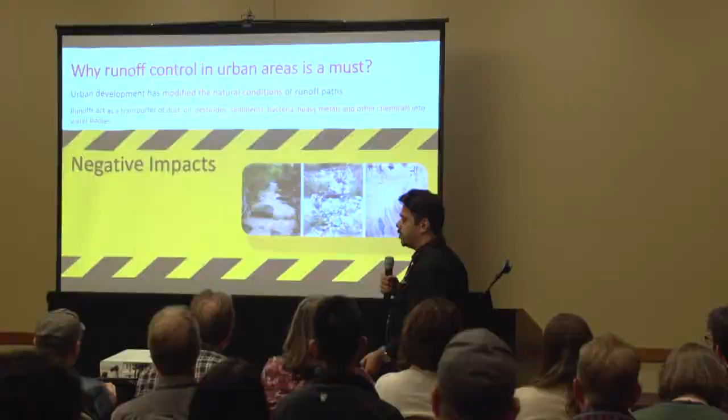When this happens, what are some of the negative impacts? The water quality will be impaired as the first consequence. The fish will be killed, right? So it endangers the aquatic life and demotes biodiversity. Then there will be more charges for the treatment of drinkable water because polluted runoffs are introduced to that water. And it impacts the health and well-being of communities, and as a result, it promotes immigration of those affected communities. So these are not small impacts - some of them could be disastrous.

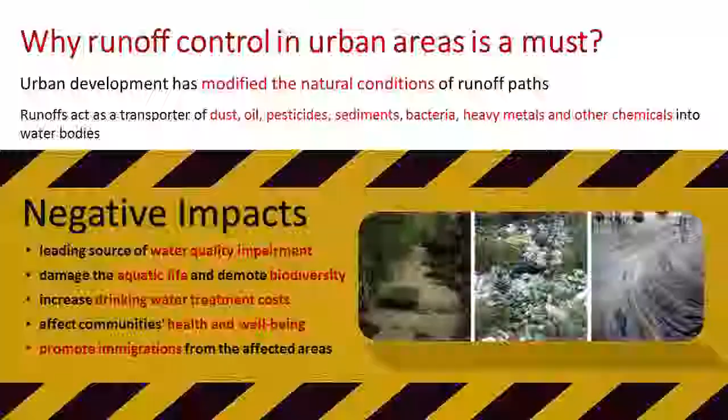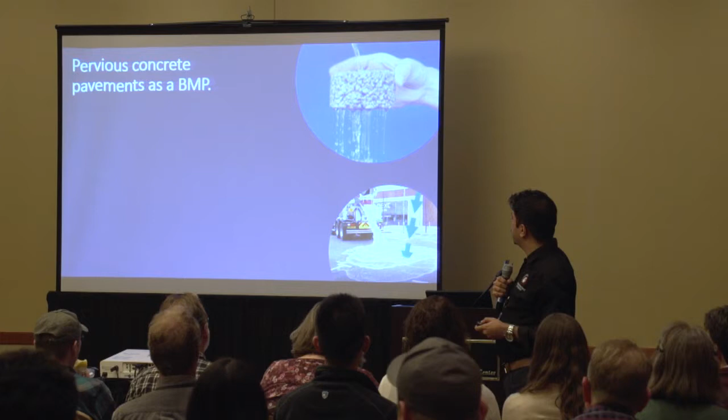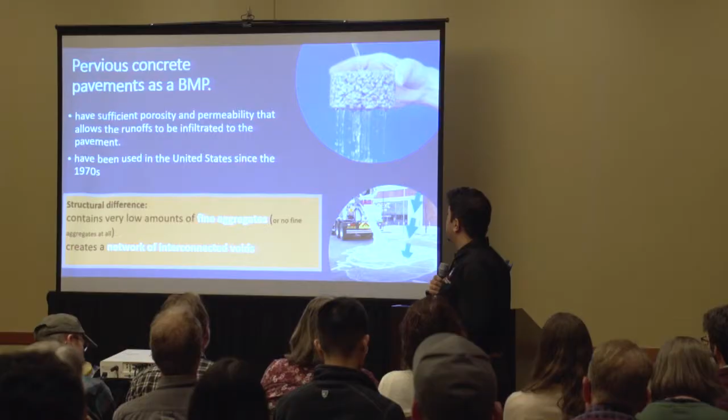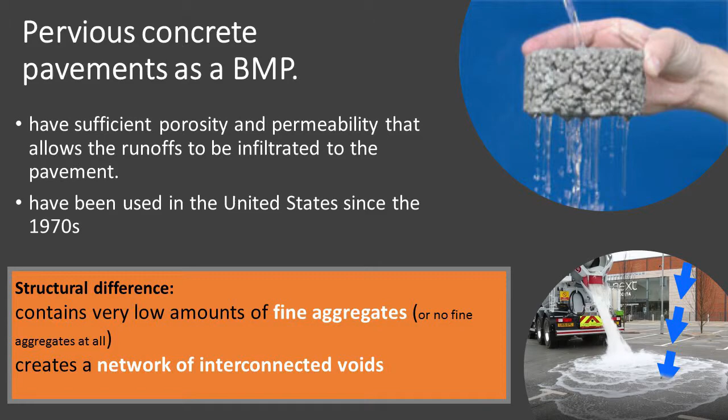This shows the necessity of management of urban runoffs. Pervious concrete pavements are a best management practice for controlling runoffs. As you see, they are capable of infiltrating water before it gets a chance to flow to other areas. They've been around since the 1970s, as I found in the literature. The most important difference between these pavements and regular concrete pavements is that, for the most part, they are made up of coarse aggregates, with very low amounts of fine aggregates. The idea is to make a network of interconnected voids that allows water to infiltrate through the pavement and go to lower levels. As you see in the picture, they are capable of capturing almost 100% of runoffs, depending on the volume - we now have very good pavements that could capture almost all of the runoffs.

What are some of the advantages of using these pavements? This compares a picture with pervious and impervious pavement. The environmental advantages of these pavements is that they control contamination. The recharge of underground water levels will be better with using these pervious pavements. They decrease the need to water for irrigation purposes because the captured water could be used for those purposes. They reduce the heat island effect, something that is not known that much, but they have a positive impact on reducing it. And they also eliminate the hydrocarbon pollution that is a consequence of using asphalt pavements. So these were some of the effects in the environmental aspect.

On the economic side, they lower installation costs, and they allow use of existing sewer systems, so you don't have to rebuild the sewer system to control the amount of runoffs. And in cities where land is expensive, like right here in Seattle, we can benefit from them because you don't need retention ponds or extra land to control the runoffs. And they lower life cycle costs. So economically, they do make sense.

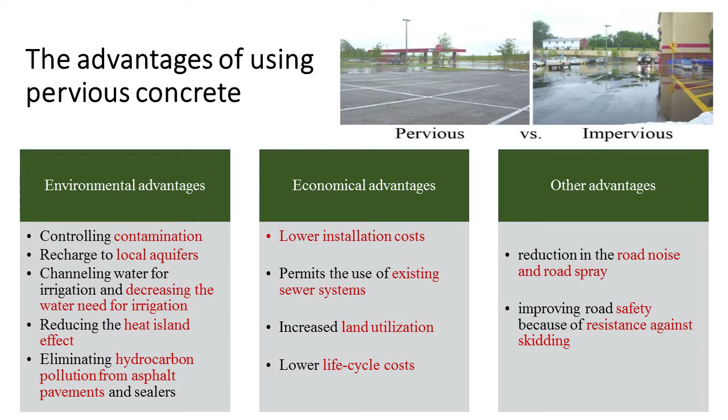Other advantages are that they reduce road noise and also road spray, which could be an issue in crowded areas. And also they improve road safety by increasing the resistance against skidding. So pervious pavements are not only good for environmental aspects, they also are good considering the economical and other aspects like safety. So why not use them?

So, major design criteria: if you want to design these pavements, you should pay attention to a few points. Number one, the properties of the anticipated precipitations, like how much rain are you going to receive, what is the length of them, and what is the severity of them. These are important factors.

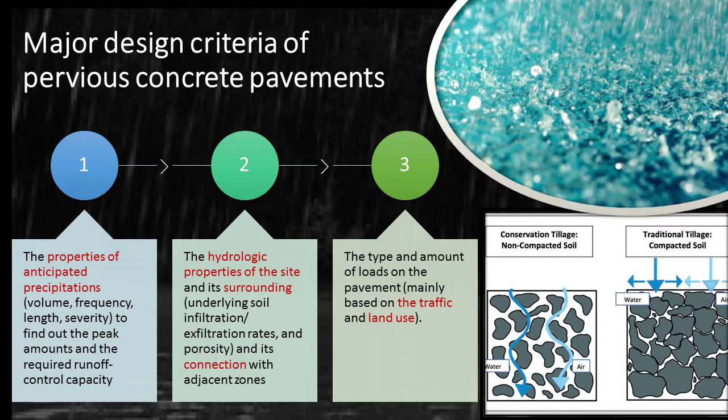The hydrologic properties of the site also matter, like what is the underlying soil, what is the quality of it, and what is the connection between pervious and impervious surfaces. And the third criterion is the amount of load applied on these pavements, because since they are porous, their compressive strength is relatively lower than regular pavements. So this is something to take into consideration.

In terms of controlling or mitigating the negative impacts of runoffs, we have two different systems: passive and active mitigation systems. The passive system tries to reduce the impervious surfaces in the hosting area, the site you are trying to control the runoffs for. In an active mitigation system, you don't only care about your own site, but also the adjacent sites, trying to control runoffs in your site plus the surrounding or neighboring areas.

Obviously, if you want to use active systems, you will need more stringent design measures because you will be hosting a greater quantity of runoffs, right? That makes sense.

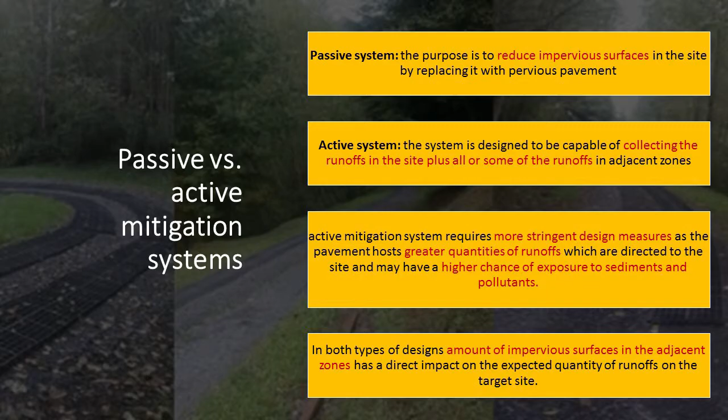Interestingly, regardless of whether you are using a passive or active system, you shouldn't only care about your own site. The amount of impervious surfaces in neighboring areas will affect your site because runoff will be transferred from those sites to yours. So that's an important factor to consider.

Now I want to talk about existing issues and potentials for enhancing the functionality of pervious concrete pavements. One issue is the infiltration and exfiltration if it's not fast enough. The amount, or actually the rate, of infiltration needed depends on the severity of the precipitations, the severity of the rainfalls.

So you need to test it with samples before you actually build it, checking the infiltration and exfiltration speeds. This is required. Another issue with these pavements is the clogging of the voids that happen in them. I will explain more about it in a little bit.

Another issue is improper slopes. Ideally, the lower or more gentle the grading or slope is, the more time water will have to infiltrate, right? While steep slopes will direct the water to other areas, which is not what we want.

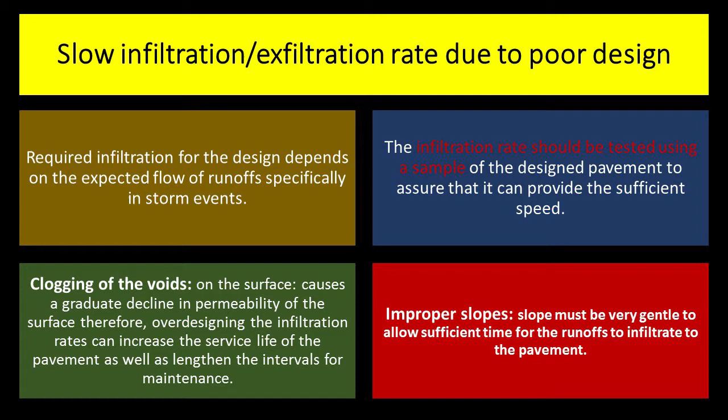Another issue is the disconnection between pervious surfaces due to poor design of the system. We cannot expect to replace all impervious surfaces with pervious ones, but you need to make sure about how you connect those two surfaces, okay?

The wrong approach is to put all the pervious surfaces in one place and then try to control the runoffs. One pervious surface should be next to one impervious surface. I mean, you should distribute the permeable or pervious surfaces between the impervious ones. That's the right approach.

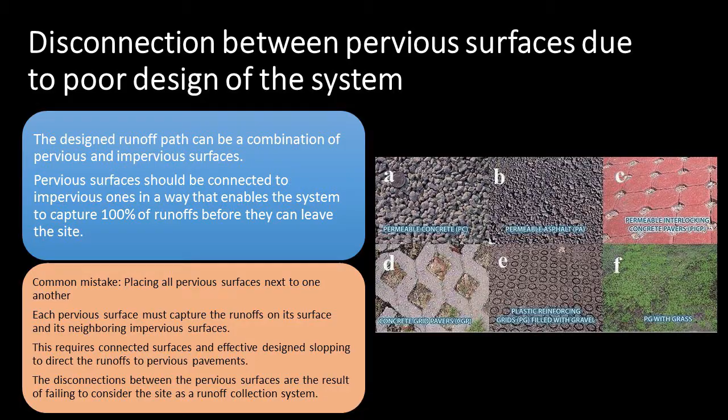So it's always a combination of both, but neither should be separate from the other, or disconnected.

Another big aspect of how pervious concrete pavements function in terms of controlling runoffs is the quality of construction. Poor construction will lead to poor functionality of these pavements. So what are some of the common issues with the construction of these pavements?

Number one, failing to set a uniform subgrade; the subgrade needs to be perfectly uniform for better functionality. Number two, failing to place the subgrade at the correct elevation, so elevation matters. Number three, failing to moisturize the subgrade before placing the concrete. And four, insufficient compaction of the subgrade.

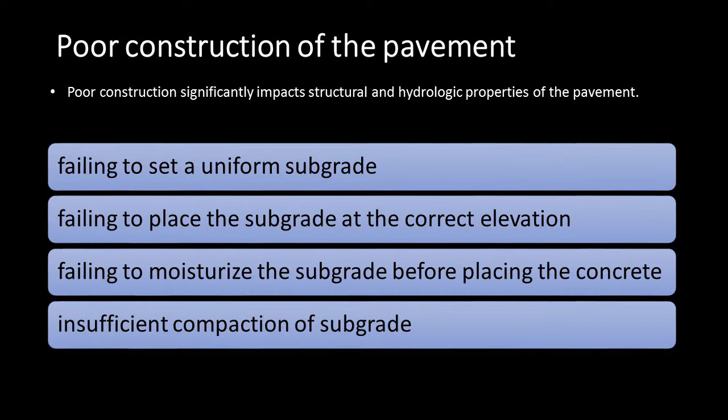So if you're involved with the construction of these pavements, you need to care about and watch these four things.

Next is the maintenance of these pavements; they do require maintenance. I should say that good maintenance comes from good design. By that I mean the design should enable access to different parts of the pavement so you can easily maintain it, okay?

What are some of the recommended practices to remove dirt, mulch, and other particles? Number one is vacuum sweeping. Some of you have seen it before. It can vacuum and suck the dust from the surface of the pavement, but the effective depth is very limited, about 1/8 of an inch, so it's not that deep.

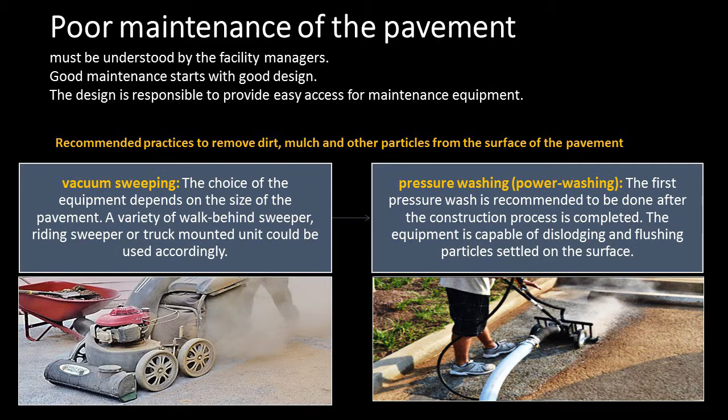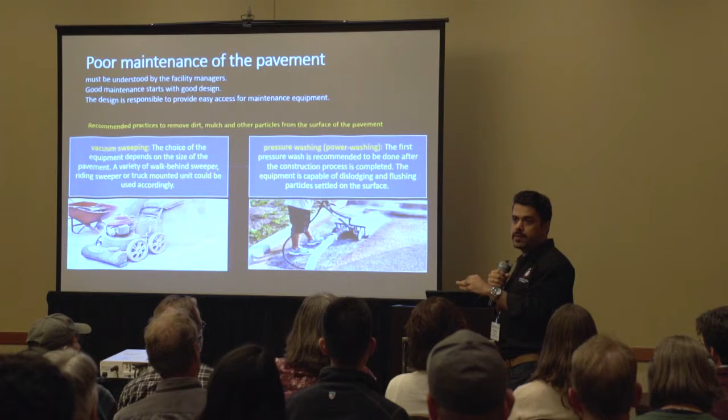The second one is pressure washing. Pressure washing is also very impactful, specifically after construction activities, which create a lot of small particles and sediments on the surface of the pavement. If the surface is filled by sediments, you have lost it, it's not pervious anymore, technically.

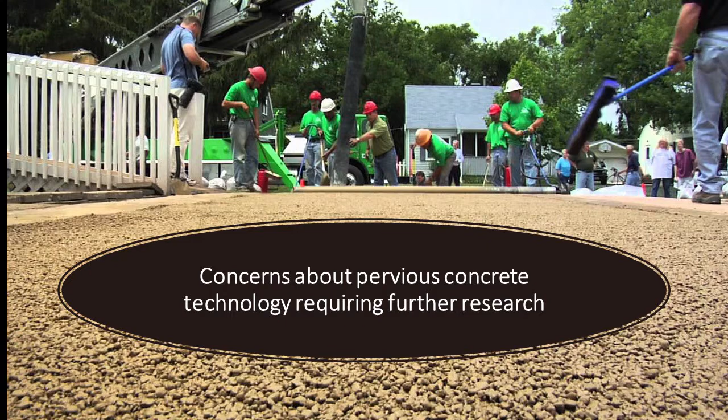What are some of the concerns about pervious concrete technology that require further research? Number one is the gradual decline in permeability and functional deterioration. How does it happen? As the voids or network of voids gets clogged over time, the permeability will be reduced and it won't function the way you'd like it to. The intensity of clogging depends on some factors.

If you want to minimize clogging, what factors do you need to take into consideration? Number one, what is the location of the pavement? This is important because it tells you the amount of exposure to clay and small particles. The measures you take should depend on the exposure of the pavement to small particles.

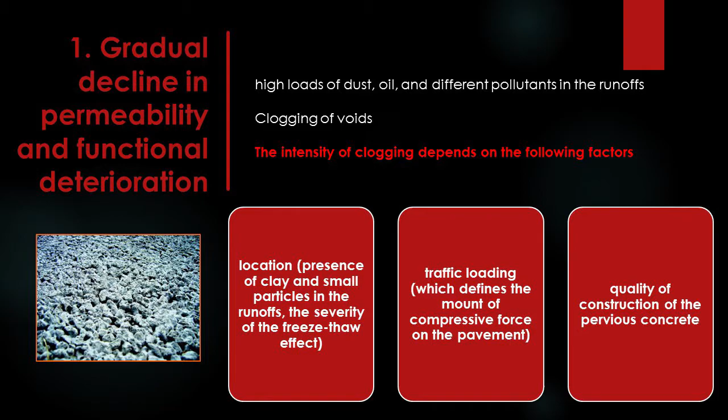Number two is the traffic loading, because porous concrete pavement is not that strong with the existing technology for compressive strength, so you should take into consideration how much load is applied on it. Number three is the quality of construction of the pervious concrete. These three items will have an impact on the speed of deterioration or decline in the permeability of these pavements.

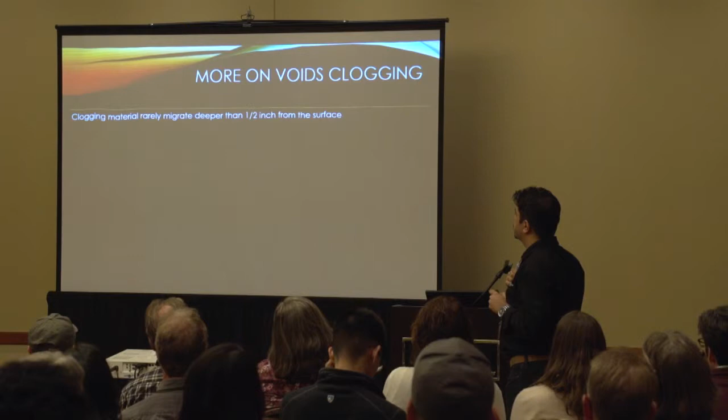Let's get some more information about voids clogging. Number one, clogging material rarely migrates deeper than half an inch. If you can manage it on the surface, it will not go deeper, based on the studies. Most of it will be captured on the surface within half an inch of depth.

Number two, unfortunately, cleaning like sweeping and vacuuming can only clean it for 1/8 of an inch. With existing knowledge, we need further research to solve that issue. Number three, the clogged materials, over time, will consolidate and get more firm, and become harder to control.

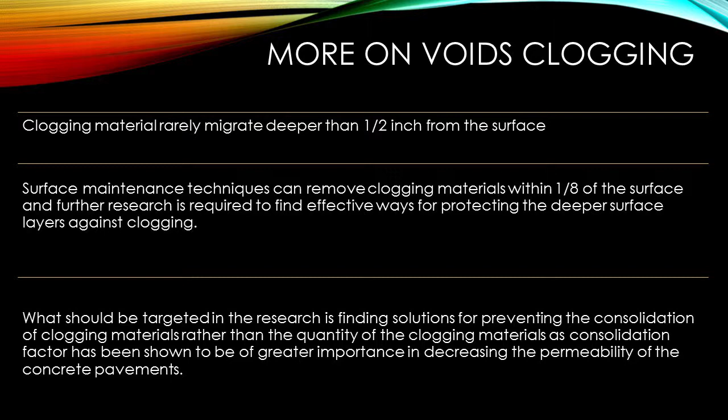Number two, reduction of water storage capacity. As a result of clogging, water cannot easily move and penetrate or infiltrate into the pavement, and that impacts the water storage capacity of these pavements. We ideally want the porosity of these pavements to be between 15% to 35%.

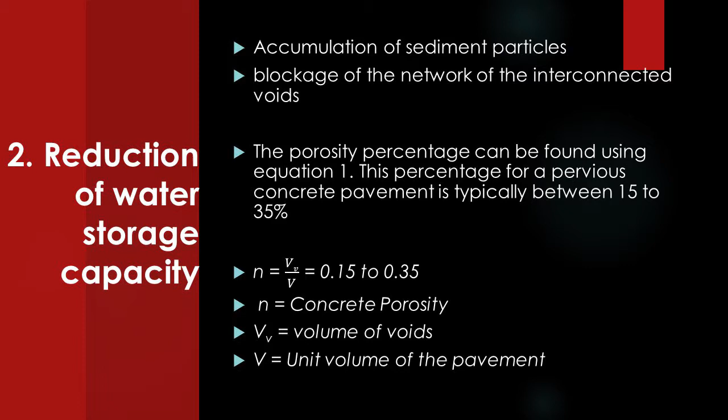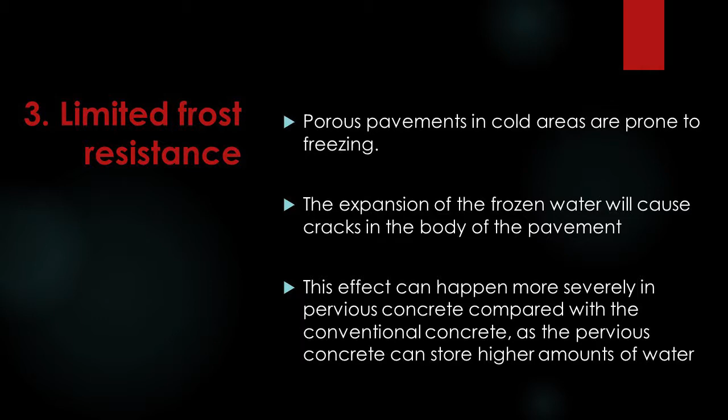The higher, the better. Another existing limitation is limited frost resistance, because it is connected to clogging. When clogging happens, water gets captured and stored in the pavement for a longer time. If the weather is too cold, the water will freeze there, and due to freeze-thaw impact, it will cause cracks in the pavement. Does that make sense?

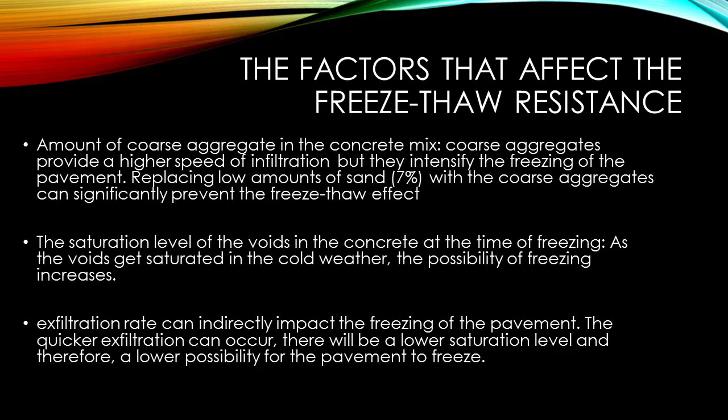The factors that affect freeze-thaw include the amount of coarse aggregates. Studies show that although coarse aggregates are better to increase permeability, using low amounts of fine aggregates could have a positive impact on increasing resistance against freeze-thaw. The percentage given is 7% fine aggregates will have a positive impact on that.

The low compressive strength is a result of high porosity of these pavements and lower use of mortar content. This can lead to structural failure, and we need further research to improve the compressive strength of these pavements.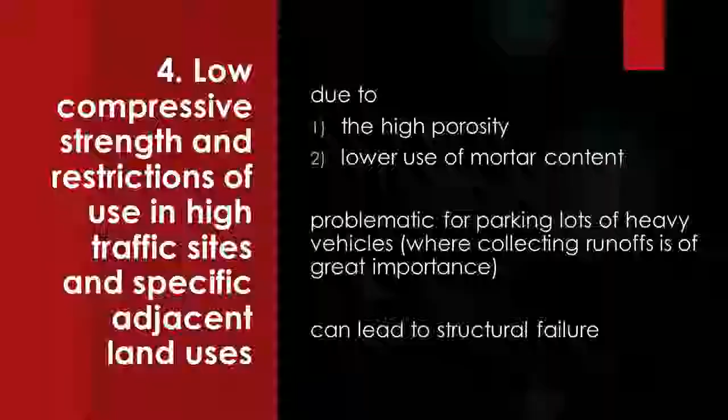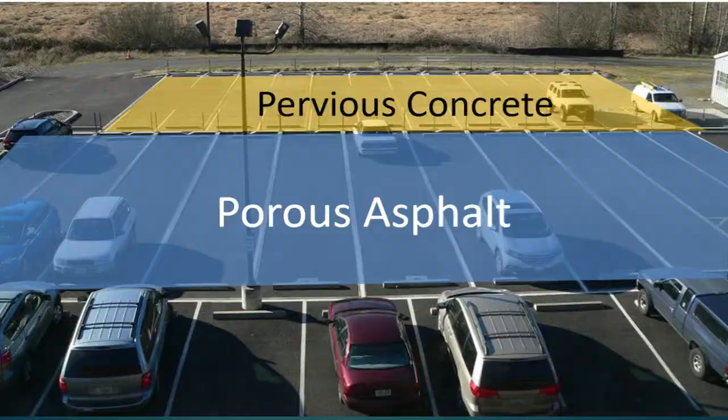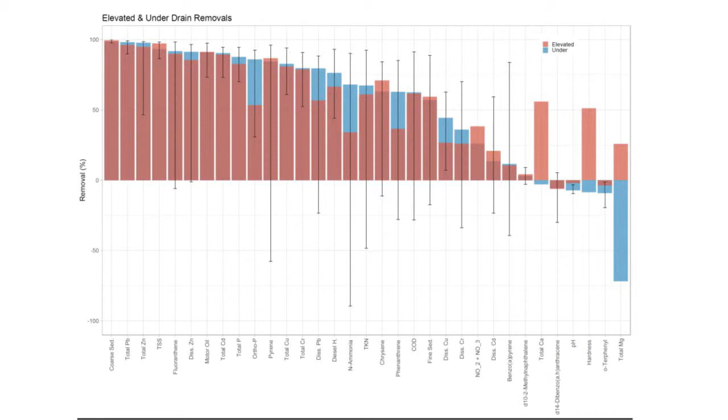In the remaining minutes, I'll present results of my friend's test. They had a pervious concrete surface and a porous asphalt, and tested it for the amount of outflow or exfiltration. As you see, this is 100%, and this is coarse aggregate, so it could capture up to 100% of coarse particles, showing that these pavements can effectively control those particles.

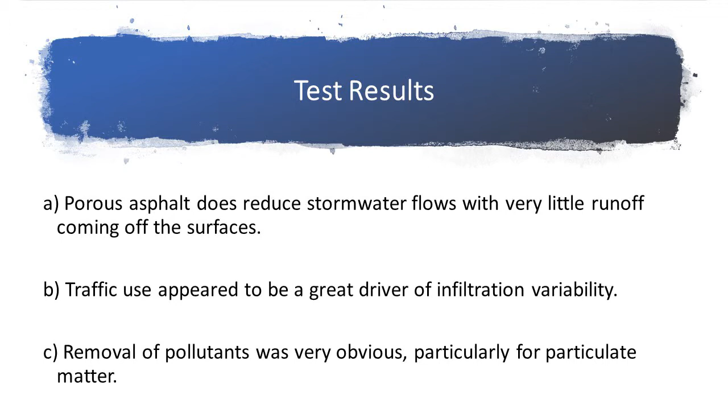The results of his experiment show that porous asphalt does reduce stormwater flows with very little runoff coming off the surfaces, and traffic use appeared to be a great driver of infiltration variability. Removal of pollutants was very obvious, particularly for particulate matter.